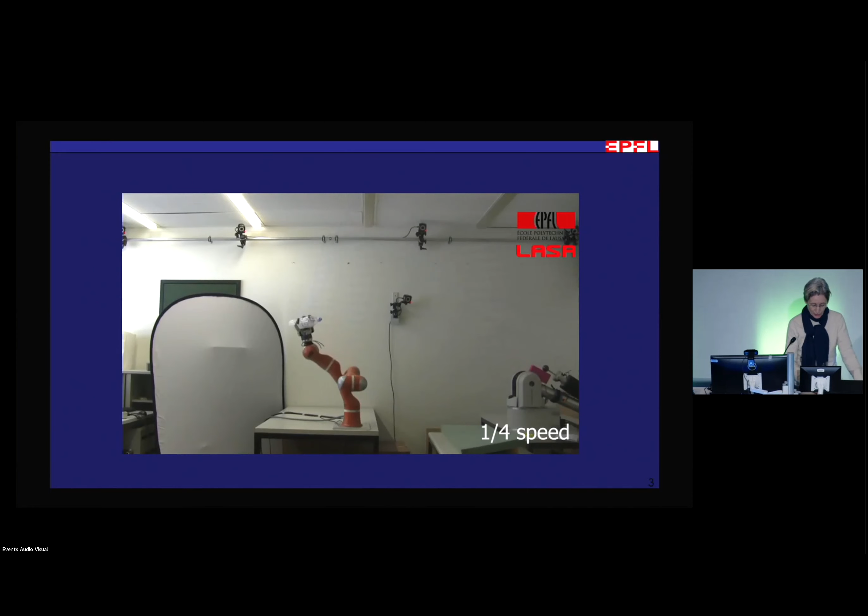Now the real challenge, and that's what I want to focus on here, is the following. When you want to compute a path, you have really milliseconds in many cases, and you want to be able to plan really fast. When we throw an object to the person, first of all the dynamics is highly nonlinear, so you need a very accurate model of these dynamics. But even if you do have that, your real problem is that the time of flight is 0.4 seconds. In a robot, we always think of robots being fast, but they're actually very slow.

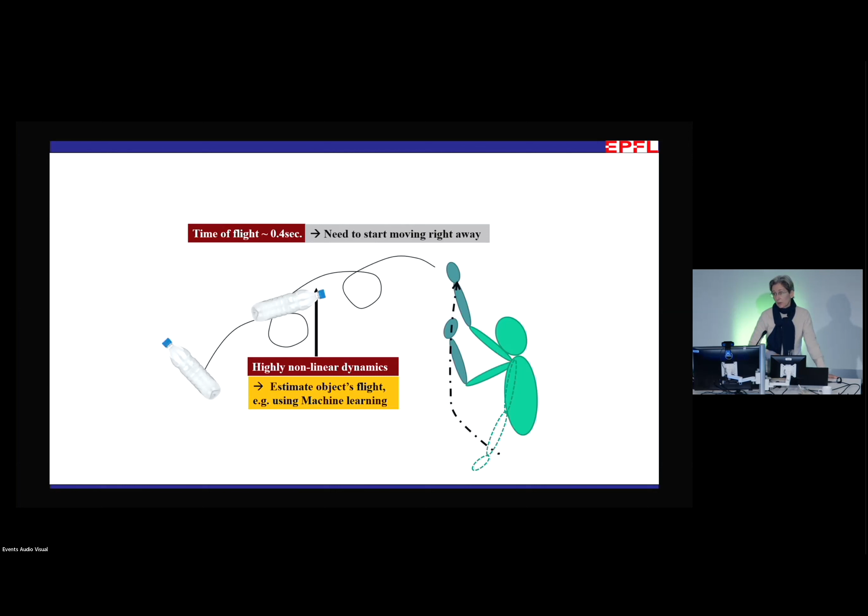So it's a little bit like the tennis player. If you want to catch this thing, you have to start moving right away. You have to start running to where you think the thing is going to land. And to do that, you need to have an estimate. If you have an estimate of where it's going to land, you want to go there, and you're going to compute a path.

So always, well, you think, okay, I have an estimate, it's fairly accurate, I have an estimate of the path I need to follow. But the reality is the following: as you go with your estimate, you have a real measurement. You keep tracking this in milliseconds, and then you see that it's not going to land where you hoped it will land. So you have to adapt, and you have to very quickly recompute a new path. That's going to be the bulk of what I want to say today.

Now, the problem of computing a real path is that you have no time to do so. You cannot run optimal control, even if you know it's going to be done in finite time—sometimes you don't even know what finite time exactly means. So the ideal is to have a model of all the feasible trajectories. In my lab we've thought about feasibility more than optimality for many years: when you know what is feasible, anything will do, because anything is feasible. So you'll pick the first trajectory you can.

And the best is, if you don't have to compute ahead, when you have a closed form expression, analytical, so you don't have to do optimization. It doesn't matter if optimization is, again, finite time—if you don't have to optimize, that's much better.

So how do we do that? I'm going to do a quick wrap up of the approach that we followed for several years. Assume that we have a workspace, and I'll come back to the idea of how we have a closed form representation of the workspace. But for now, let's assume we have some workspace, and we know that the object is going to travel and at some point land into the workspace.

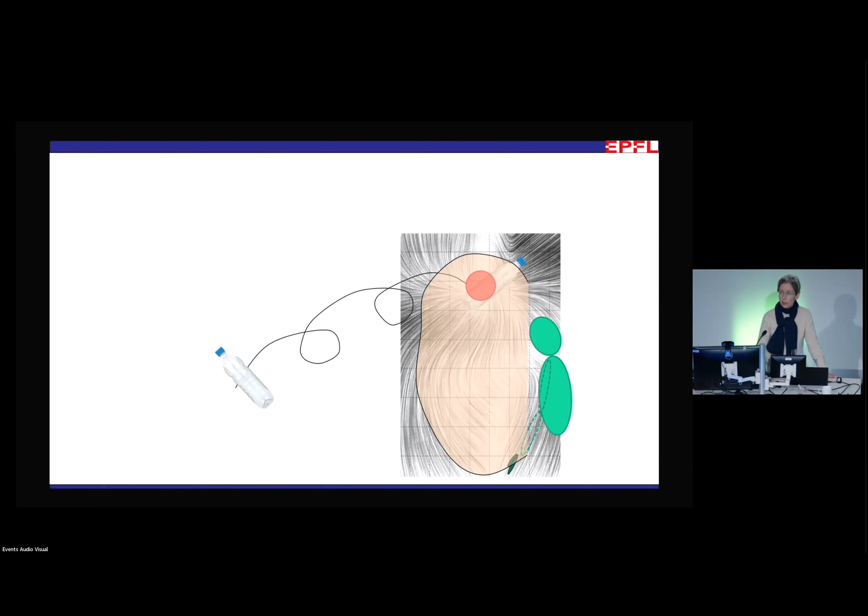So what we want is to have a representation of this feasibility path. And the way that we approached that was to say, well, we do have a closed form solution of this feasibility space. So I remove now the representation of the workspace, and we just look at the feasibility space.

We thought of it as saying, we're going to go with differential equation. That's probably my background in physics, but in physics, you always use differential equation to explain any of the phenomenon. And you often have characteristics for this differential equation. So just a first order differential equation can give you a flow. And if it's time invariant, then it gives you a flow of velocity, which we see here.

And if we do have that in closed form, if we have this functional f in closed form, then we have an infinite number of those paths. And we just have to follow f. We don't have to plan ahead, especially if f has some guarantee.

And here is a theoretical guarantee. So the one that we use mostly is this: at the limit, it always goes to a single fixed point. So you have a differential equation, and it vanishes only at one point. And what does it mean if it vanishes? It means that the velocity becomes zero, so you actually stop where you want to catch the object.

Now, the big problem, of course, is what if you don't have f? If you do have f, then everything is fine. If you don't have it, then you can learn it. And we've done quite a lot of work on learning that from demonstration.

Typically, you can get some demonstration like this. These are your samples. And from those samples, you can build a probabilistic model, which we did as a mixture of Gauss function at the time. And then we could compute an explicit estimate, which is taking the expectation of the conditional of the joint model.

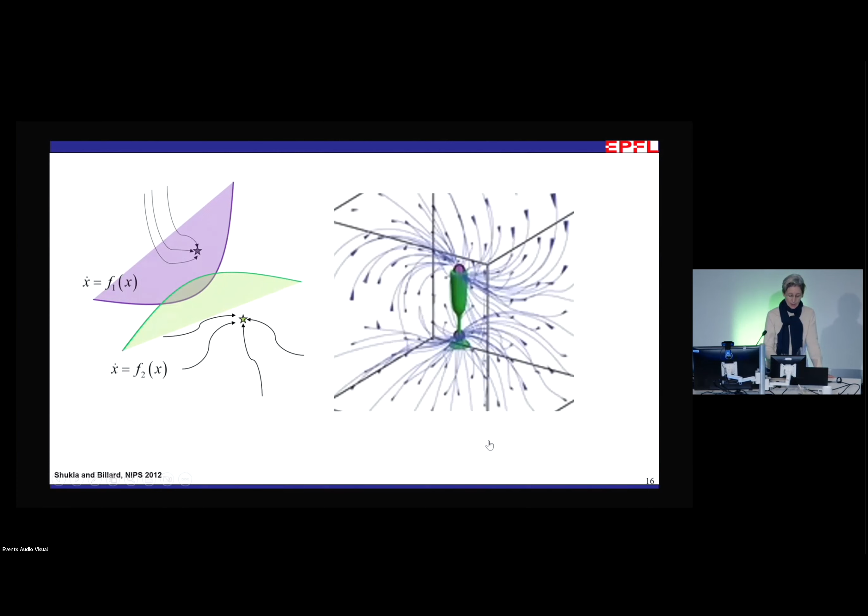So you can simply use the objective function of SVM and then combine the regression and classification constraints, but applied to this particular case, which is following a dynamical system. And then you can add one more constraint, which is to reinforce the stability at the different attractors. So you can do that as a convex optimization - you retain the convexity of the original problem. And you can then learn, and you do a multi-class classification - that means you classify one dynamics and then the other dynamics, and then you do an argmax to get the full dynamics. So that was one of the early applications that we did, to be able to catch at runtime, to choose if we were closing a tight fist or a large fist to catch.

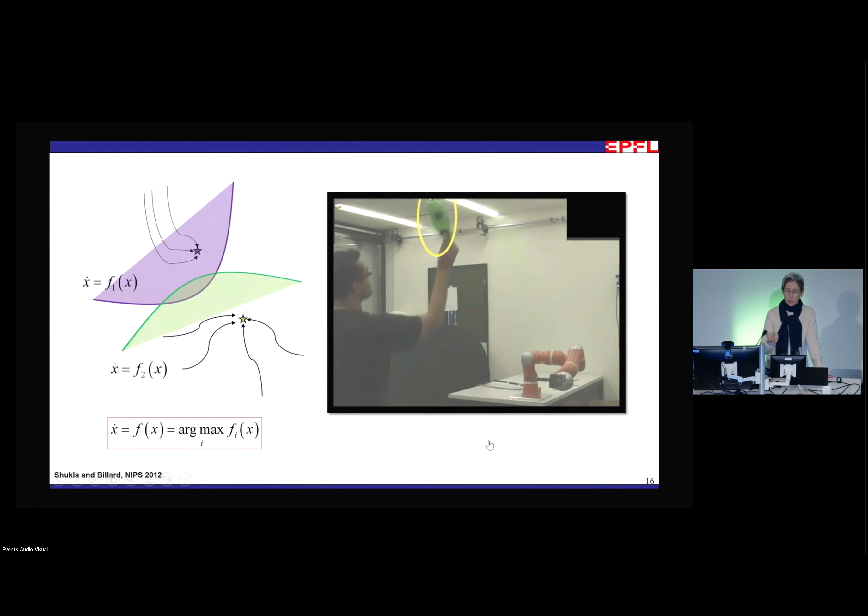Right, so that's the end for the background. What we could do was to automatically partition space, as we see here, and learn different dynamics on those different partitions. But that was an exact partitioning of the space, and another problem is that it was a supervised learning problem. In other words, you had to know how many dynamics there were, and you had to label your data points.

So we thought that's a good starting point to think of this as an unsupervised learning problem. We like to be able to automatically infer how many dynamics exist, which shape we have for each of the dynamics, and where the attractors are located.

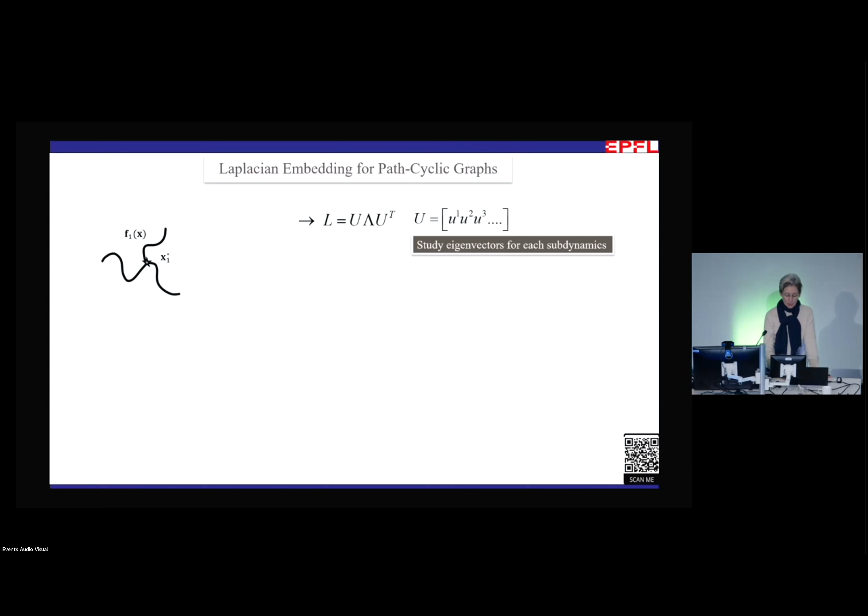So this is already known, and this is a nice way that you can recover the number of dynamics. You have this for free. You've created a graph, you've created this with this nice kernel, and then you get the number of dynamics. Just from these results, there is nothing very new in there. But then we looked at the eigenvectors of this, and it turns out that the eigenvectors are extremely interesting.

If you look at the eigenvectors of this Laplacian, what you can prove is that they actually decompose into k sets of eigenvectors, and among those, if you have k dynamics, there exists always at least a pair of eigenvectors that have this property where 2 of the eigenvalues are equal, and also they're very small.

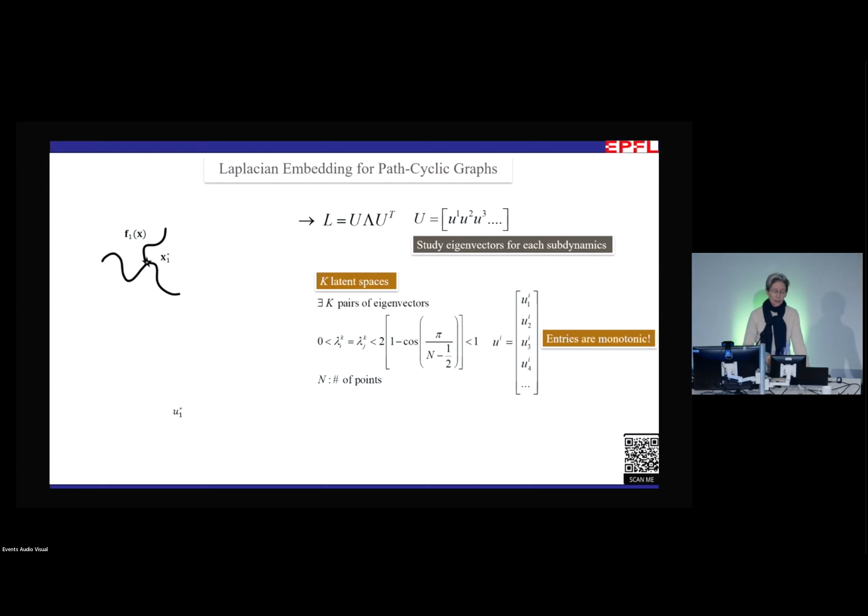And the funny thing is that it turns out that these eigenvectors have properties that follow Chebyshev polynomials. In other words, the entries of the eigenvectors are monotonic. So this sounds very complex. What does that mean, that they are monotonic? Essentially, what it means is that once you project onto those eigenvectors, your dynamic suddenly is linear because it's monotonic. The monotonicity grows with the same eigenvalue, so they grow with the same rate, so it's linear.

In other words, you went from having a very complex data set where you did not know how many dynamics you had. You discovered the number of dynamics using this notion of multiplicity of the eigenvalue, and then you discover eigenvectors immediately just from the graph Laplacian, and then you discover latent spaces, plural. You have as many as you have dynamics, in which each of the dynamics is linear. I thought that was cool.

We could prove that it was true for 2 eigenvectors. It turns out that we could also show more recently that it's actually true, if you have a dimension of D, for D-1 eigenvectors, which allows you to completely reconstruct this. It's not exactly linear, it's quasi-linear, and it becomes linear with O of 1 over n squared, where n is the number of points. So the more points you have, the more linear you are. And so that's quite nice.

So I'll just show you a couple of examples. If you have an original dynamics like this, where this is only one dynamics, and we've extracted the dynamics with the clustering, what you can look at are the eigenvalues, and the eigenvalues show you that there are 3 in this case that have exactly the same value. So there exist 3 eigenvectors that are monotonic. And you can do a 2D or a 3D latent projection where your system is linear. So you go from nonlinear to linear. Okay, D-1. So we went for four, and then we land in 3 dimensions.

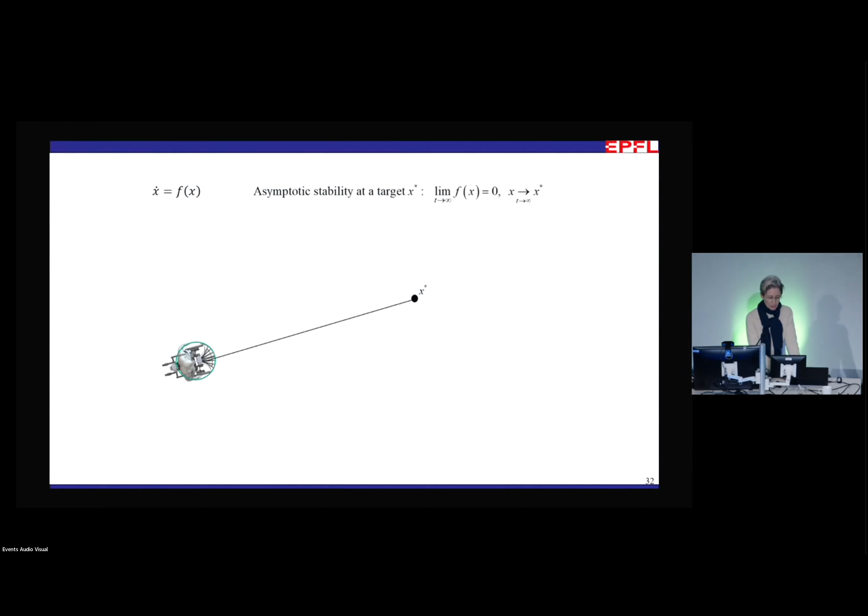So again, if we go back to our original representation, we have a dynamical system with asymptotic stability to some attractor. I can control a wheelchair like this. It goes in a straight line, in this case a linear system. And if it, for instance, slides, then again, I can recompute immediately the path. Now, this can be used with obstacle avoidance in a simple way. If you do have obstacles here, you can represent them in your flow, and you can modulate your flow by a multiplication term. You multiply your original dynamics. And now you have to pay attention to how I multiply that. So we're going to talk a little bit about eigenvalues and eigenvectors again.

If we want to multiply the flow in such a way that it doesn't go into a certain area, then you need to make this area vanish. It needs to become infeasible in your feasibility space. And you can do that with this M of X by creating a vanishing flow. So what we want is, of course, to preserve the stability of the attractor. So we want our M of X to retain stability. In other words, our original dynamics must remain the original dynamics. So M of X must become identity close to the attractor, in a ball around it.

But close to the obstacle, we want this to disappear. So it should not be identity. On the contrary, it should be able to deflect the flow. So there are ways in which I can subtract like this. I can create holes in my dynamics, but my dynamics still flows. It's very similar to what you have in fluid dynamics. Actually, it's completely inspired from fluid dynamics. So you want a flow to be deflected, and usually what you do is to deflect it along the tangent. So you need to compute the tangent to your space. And in order to compute your tangent, you need to have a representation of your obstacle. And that will be the rest of my talk. I'm going to talk about how we can use machine learning to learn a very complex shape of this obstacle. But let's just keep now with this.

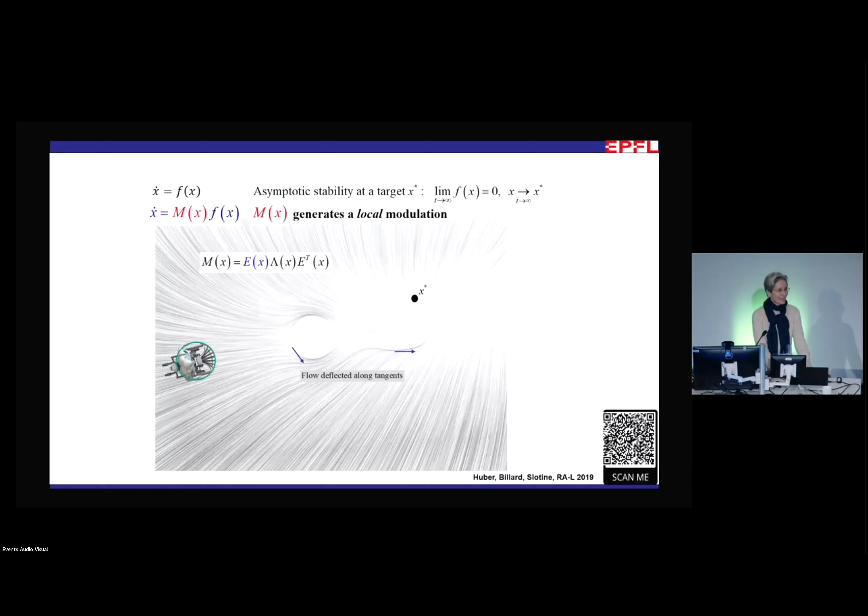Oh, I have 2 minutes left. Oh, I'm sorry. Okay. Is it? 30 minutes. So I have 13. Oh, boy. That's bad for my heart. All right, so I'll speed up a little bit.

Okay, so again, we're back into this notion of moving frames. So for M of X, what we did was to do an eigen composition. As opposed to doing an eigen decomposition as before, we can turn the problem around. You can always create a matrix by choosing a set of eigenvectors as you want, and then a set of eigenvalues. I'm going to go a little quicker. So one can compute a moving frame and then use this moving frame as the eigenvectors of this matrix, in such a way that you rotate. So you keep rotating with the moving frame. And more than that, what you need is, of course, to make sure that your flow does not penetrate the obstacle. For this, you need to turn, and in order to turn, you need to make sure that any dynamics along the obstacle vanishes.

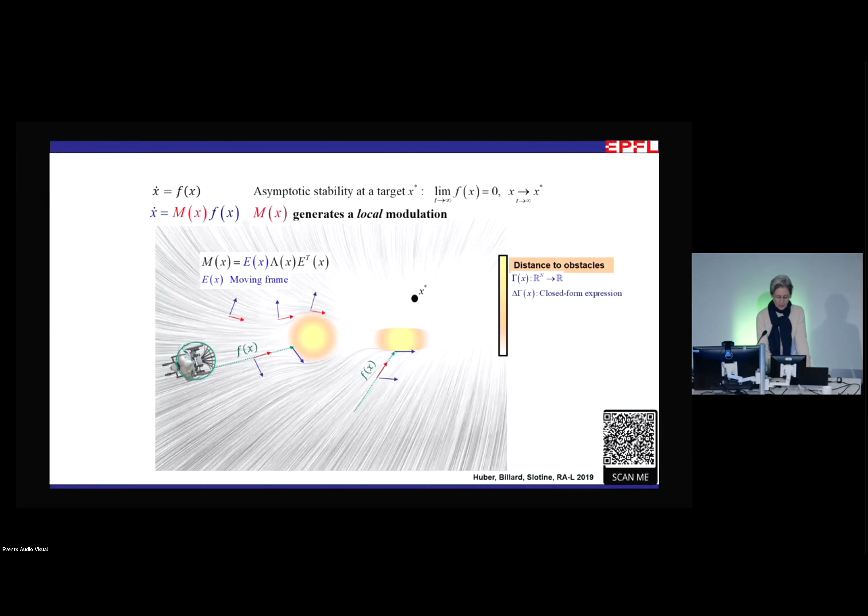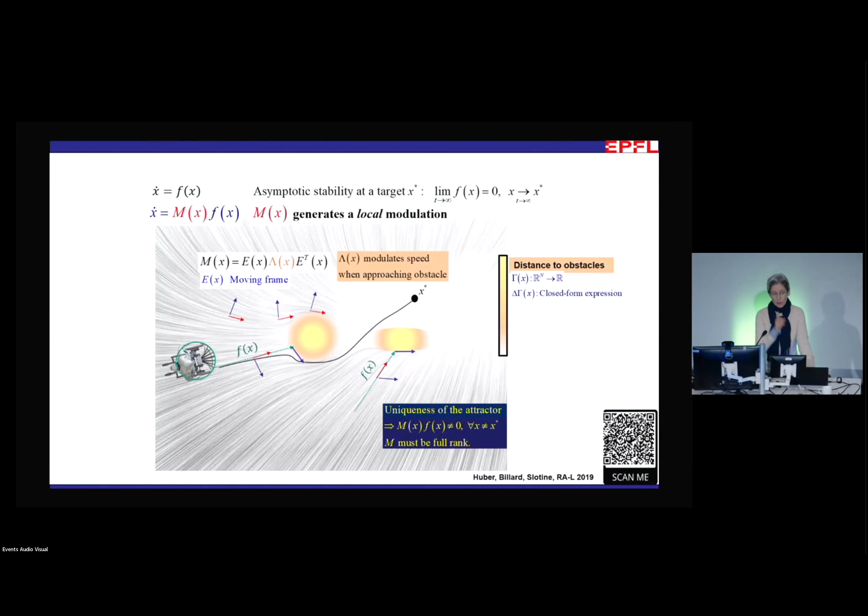So we can do that by computing a distance to the obstacle, which is a closed form expression, modulate the speed, and then deflect. And what we can prove is that we do not penetrate the obstacle. We don't incur any local attractor except for one. There always exists one, but it's a unique spurious attractor, and so we can deflect that. More recently, we've expanded this by reusing something that Koditschek had proposed, which was that you can also enclose the space. You can turn your boundary around. You can also force your system to live inside the space. And inside that space, you can have a dynamics which lives there.

And also quite interesting, you can have a deforming space. So if you do have the envelope of your obstacle, and you know how this envelope changes, which is typically the case when you have pedestrians around, then you can always enclose your dynamics around this envelope. I'll go very quickly through that, but we did extensive assessment of that. Here it's the city market in Lausanne.

We also went to the Christmas market, which is more complex because of the behavior of the crowds, which is very difficult, as I said, to predict. But not only that, it's also because it's night time. So the sensors are not very precise. You detect people very late. And most importantly, the density is really very high. So you have to constantly react to these different obstacles.

But all of this you have in closed form. More recently, we showed that it was possible to also extend that to joint space and to be able to avoid obstacles with your different joints, as it is here. And for this, this is what I want to focus on, you need to have a distance in joint space. So to have a distance to obstacle, we need to have a function, gamma here, a closed form expression.

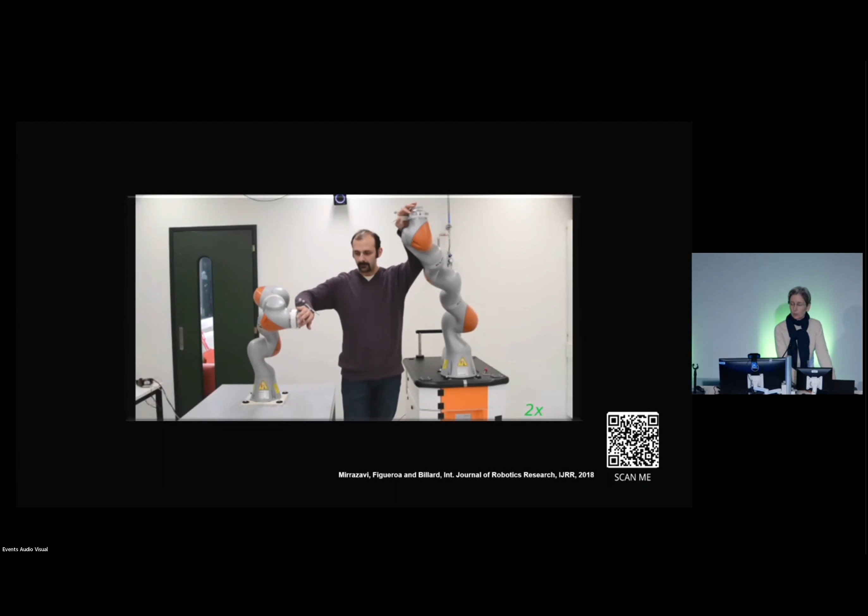What we did first was use support vector classification, which gives you nice things, such as that with a support vector machine, outside the boundary you're either negative or positive, and you're exactly one at the boundary, and then you can use this as a gradient. And this could be formulated as a QP problem, which was solvable in real time. And this was a very nice example of how this could be used at runtime.

The two robots are tracking the attractors, which are the two hands of Sina Mirrazavi here. And at the same time, they're avoiding each other at runtime. And of course, there is no time for planning, right? Because the person is just moving the arm left and right. Both are tracking this attractor, but they have to avoid each other and not collide with this person.

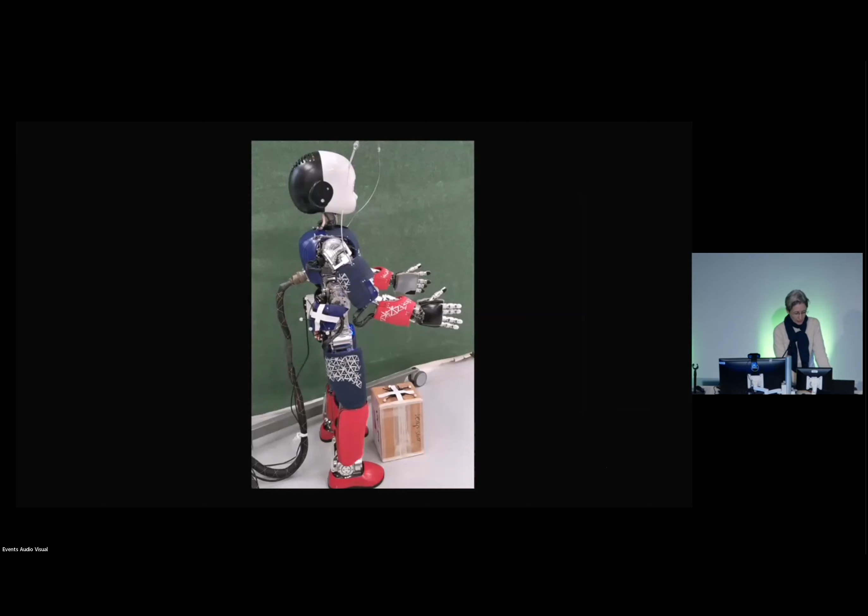More recently, we looked at how we could extend this in even higher dimensional space, when we want to use the full degrees of freedom of a humanoid robot, like this one. I always think that we have these beautiful humanoid robots, but we usually don't use the full number of degrees of freedom. And what I like is that they can crouch down and pick up objects. If you go with standard inverse kinematics, what happens often is that you're going to hit yourself. You're going to hit the joint.

But again, all those joints, all these kinematics are known, so you can learn that offline. We compared the performance. In this case, we moved to neural networks, which were more performant in terms of the evaluation time after learning, of course, not during learning. And then we can use it at runtime, again, with a QP solver, same framework as before. And that's what you see presented.

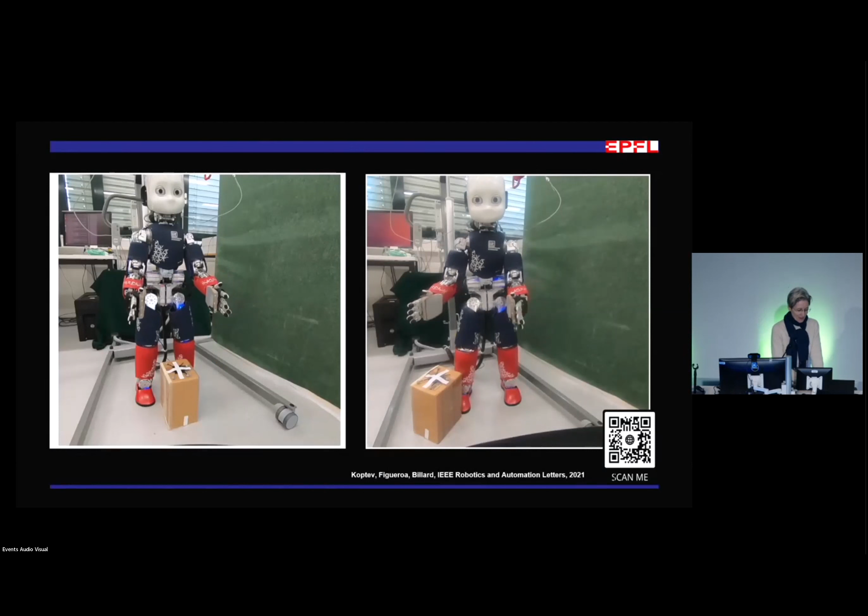What is really nice is when you look at the result. So on the left-hand side, you have the self-collision model, which is going straight, linear. On the right-hand side, you see what is quite natural. You go down and then up, you lift yourself again. You put your butt up, basically, to give yourself more freedom, but still retaining the stability. Very, very nice example of application of this.

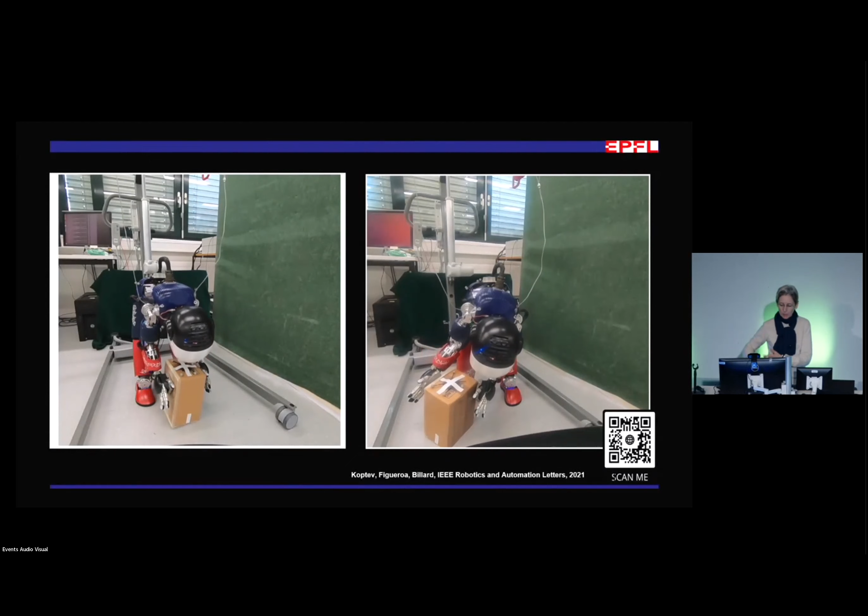I particularly like the one on the right-hand side, where it really uses all the degrees of freedom, all the workspace of the robot to pick up the box on the right-hand side. It's a little painful. It looks like the back is hurting for the robot. It's because it's stretching a little bit its joint. By the way, this is the iCub robot, and beautiful work done at IIT.

Lastly, if Ken allows me, one thing that I'm absolutely passionate about is fine manipulation. So it's also the same problem. We think of high degrees of freedom in terms of humanoid robots, but our hands are also high degrees of freedom, and they collide with each other all the time, especially if you manipulate objects.

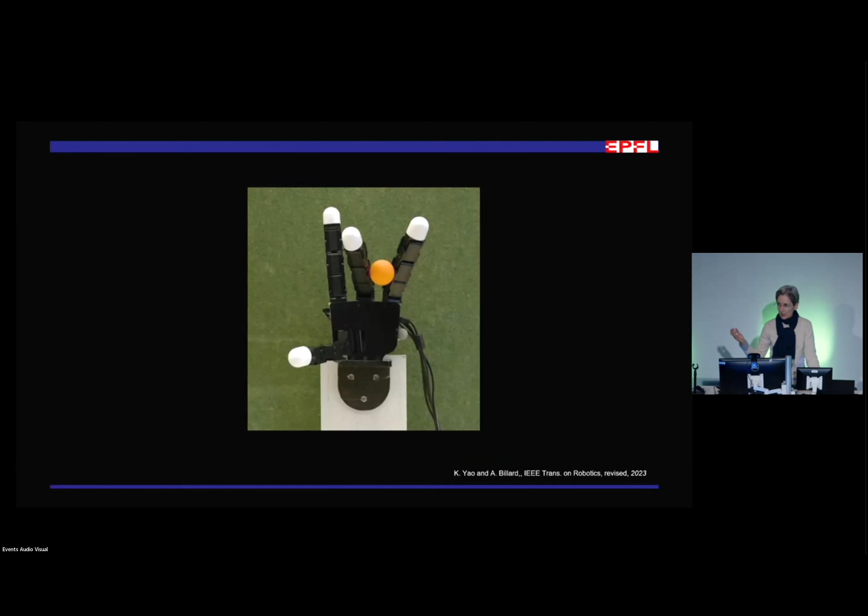I've seen too many examples in robotics where we pick up objects with only a 2-finger tip, as if we were disgusted by it. And I never do that. I always hold lots of things in my fingers. And so I so much wanted to see that. So recently, we've had a very nice piece of work done by Kunpeng Yao in my group to be able to pick up and hold various objects within the hands to really use, again, all these degrees of freedom.

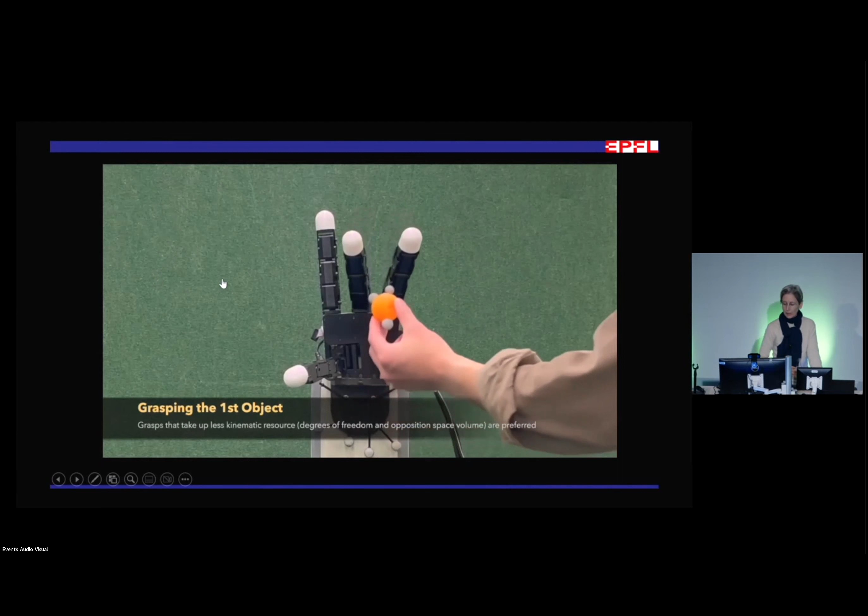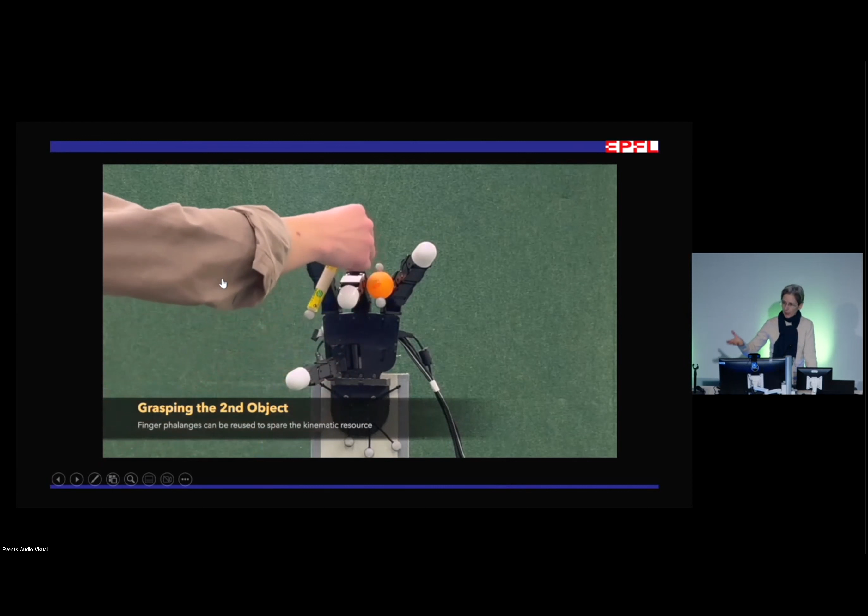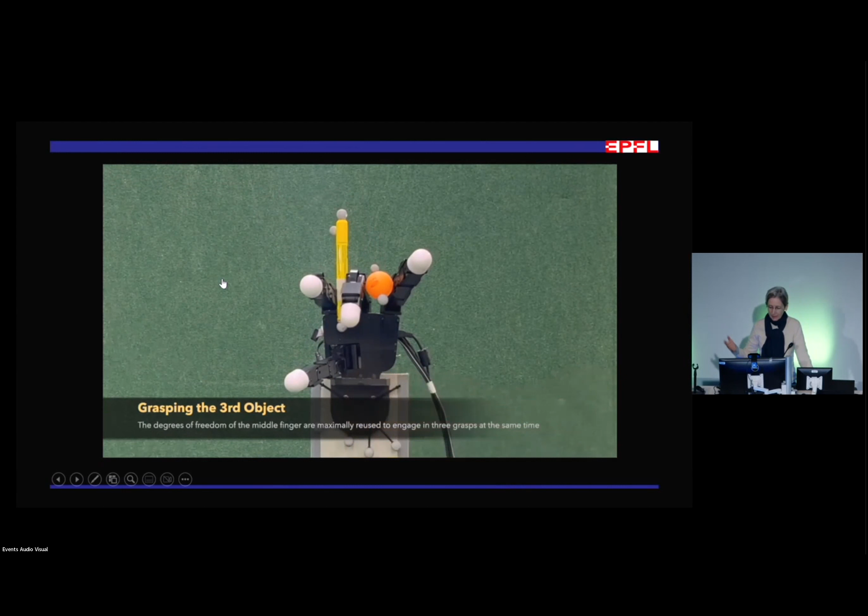And I'll show you a first video where, once you have all this configuration, you can put the object inside the hands and you can have the robot holding that. Now, this is completely pre-coded, handcrafted. The motions of the fingers are pre-coded in such a way that they do not intersect with each other, and you can hold the objects nicely. And then I'll explain to you in a second why this is a problem.

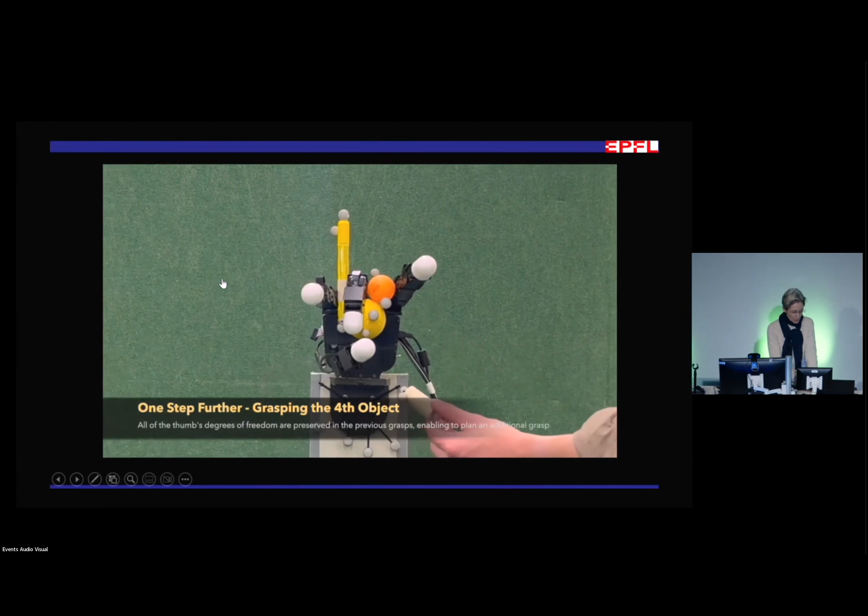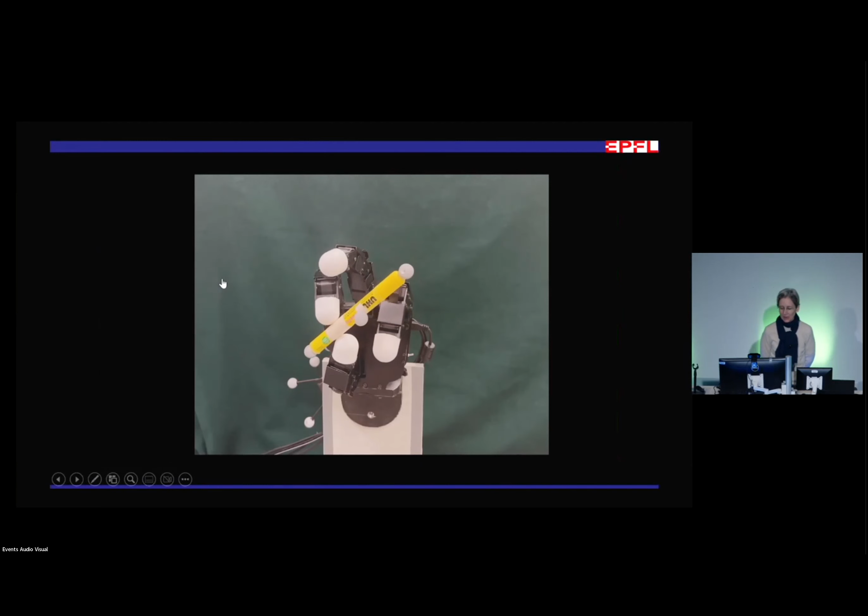So yeah, this is just to show that it's quite reactive, and then we can grab the fourth object. So all of those are stable grips, and you can hold many different objects. But the problem, as you can see, is to compute a feasible path, which doesn't fall. So I thought of Ken, who said that we have to show our dirty laundry. So here we go. So when you hold an object, what often happens in reality is this. You hold it and then it slips, or what happened here is actually it got hit slightly by one of the fingers when you were trying to grasp it.

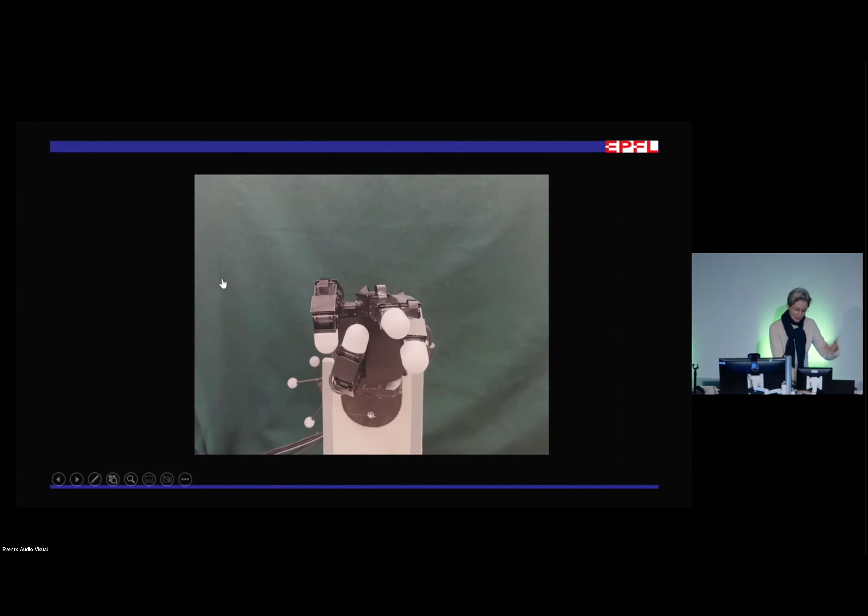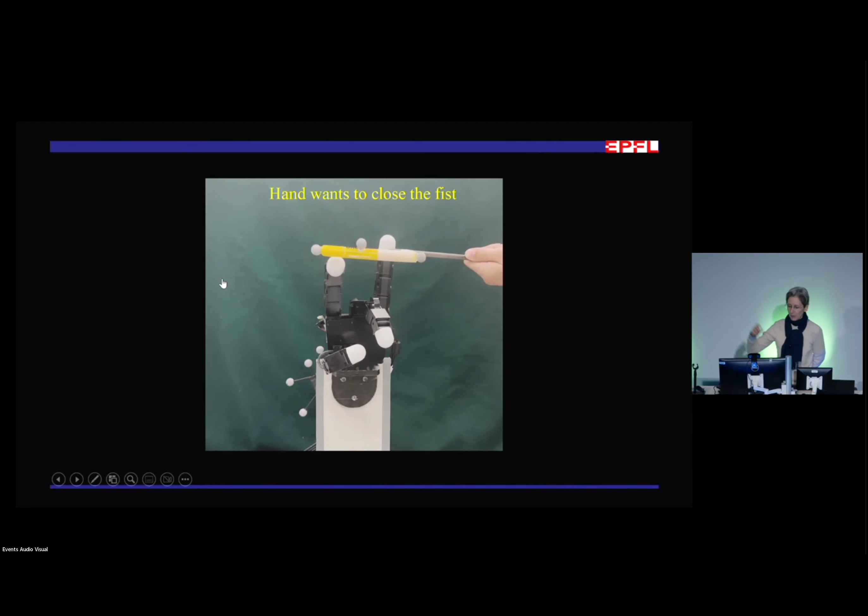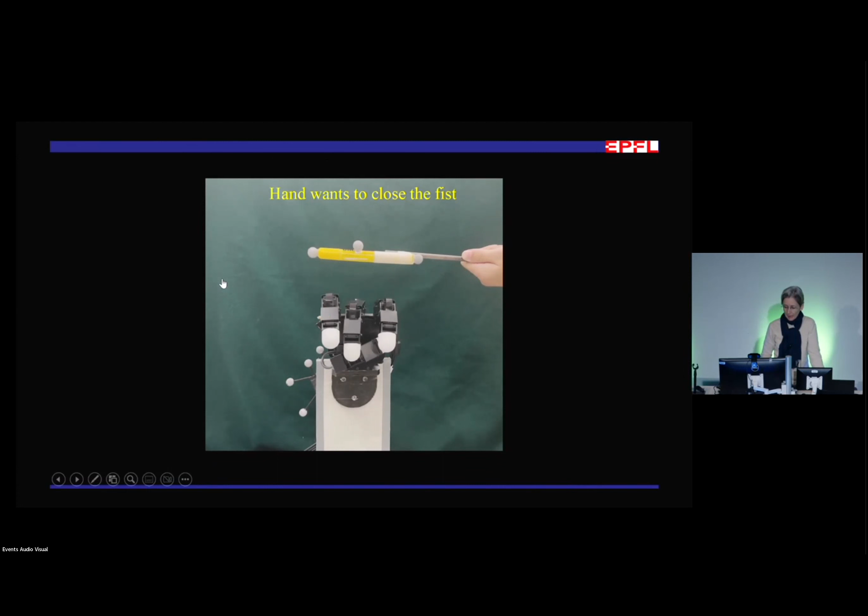Now, this is dirty laundry, but that moved us to think about, again, how can we learn all this collision space so we can sample, the same way as what we've done for the two arms, what we've done for the humanoid. You can sample in joint space of the hands. And once you have this, then you can compute at runtime. Here, the robot wants to close its fist, but needs to avoid this particular object. You can compute at runtime avoidance of both an external object as well as your own fingers until you manage to close the fist.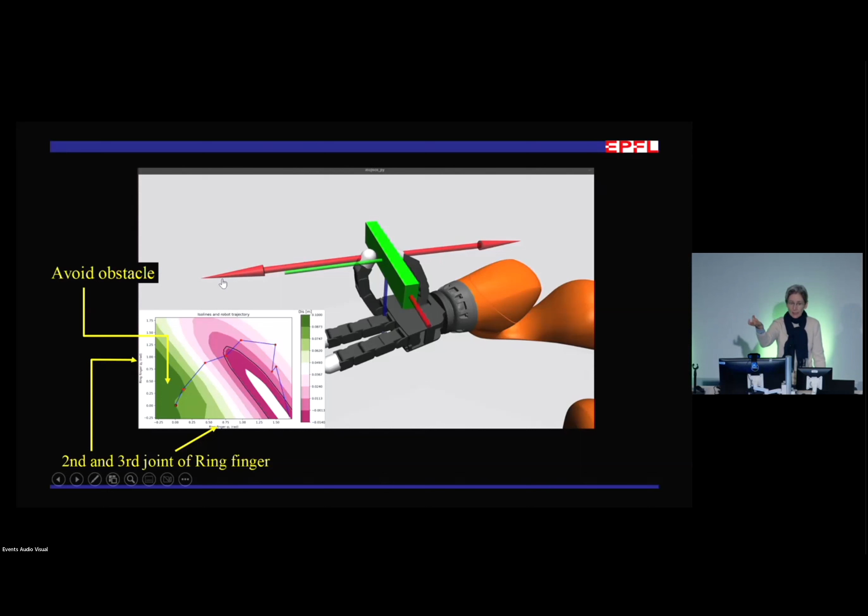This notion of obstacle avoidance can be turned around. You can avoid obstacles. Here we'll see again the same plot as I showed before, where you have the boundary that keeps moving, for only two joints. We cannot see it in many dimensions. At the beginning, the path that you see illustrated here needs to avoid the obstacle to come and pick the object, but then it needs to close on the obstacle. So you can turn this boundary either by deflecting the flow away or bringing the flow towards it. And that's the nice thing about having a closed-form, differentiable expression of the boundary.

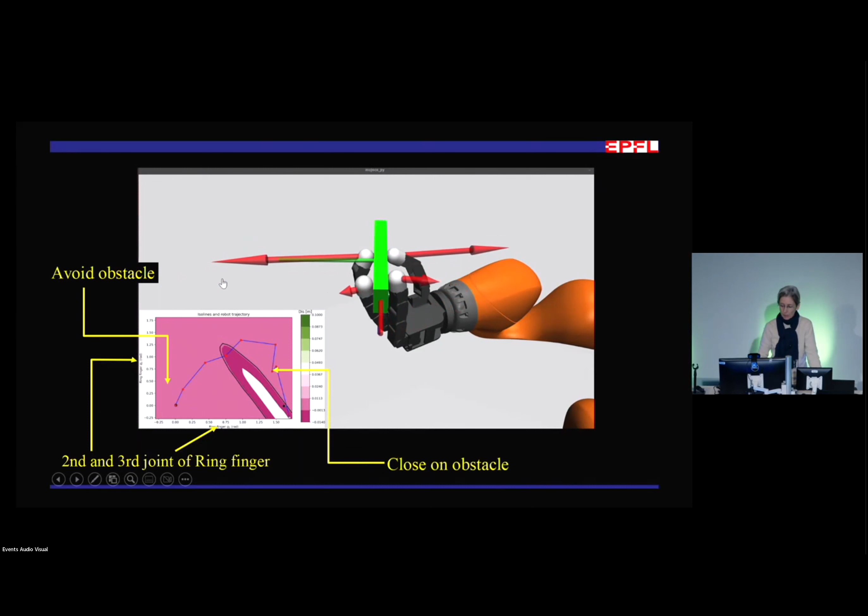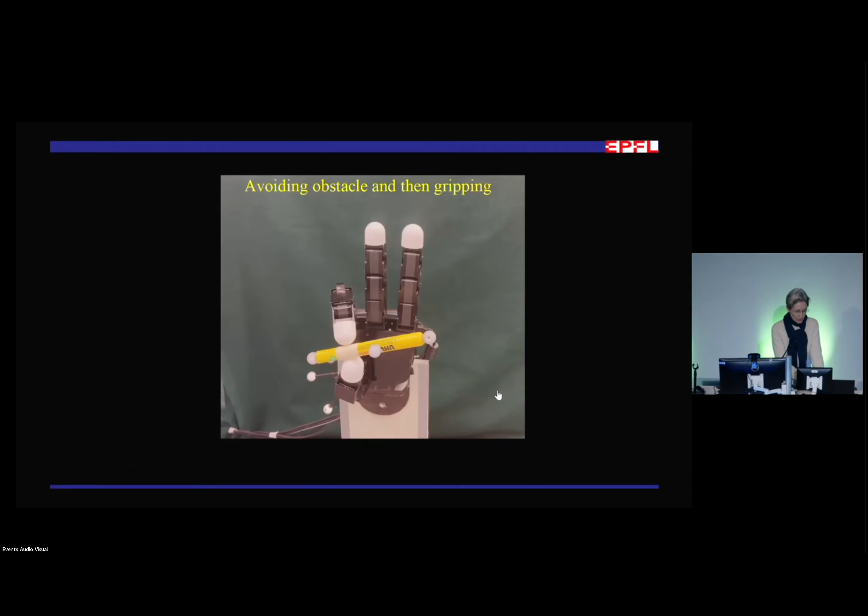So this is in simulation, and I'll close with having this in a real robot. So this is an example where it was failing earlier on. Once you do have the obstacle avoidance methods, then you can compute explicitly this avoidance, go around it, and then eventually close.